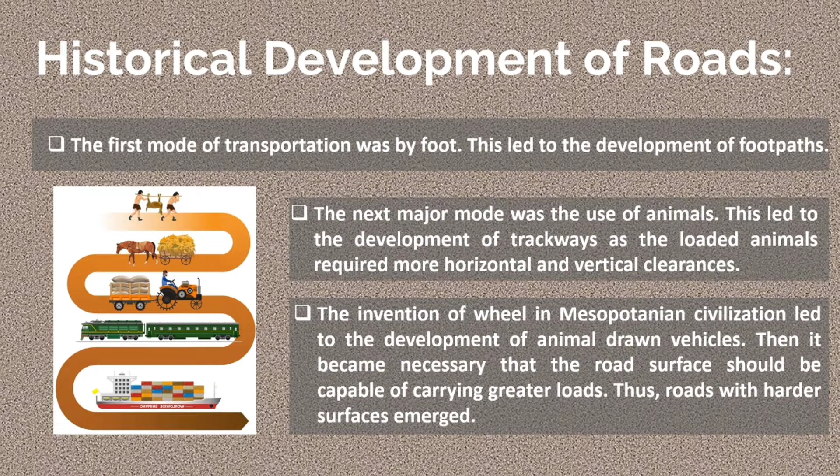Prior to our modern roadways, transportation went through a series of evolutions. The first mode of transportation was by foot, which led to the development of footpaths. Then the next major progress was the use of animals, leading to trackways, as loaded animals required more horizontal and vertical clearance. Then came the invention of the wheel in Mesopotamian civilizations, leading to animal-drawn vehicles. Later, it became necessary for road surfaces to carry greater loads, so roads with harder surfaces emerged.

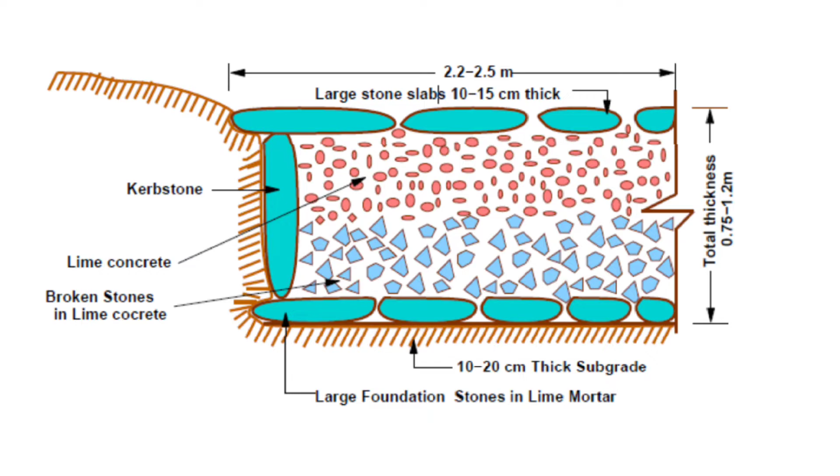The Romans were the first to construct an extensive system of roads radiating in many directions from Rome, since they recognized that the fundamentals of good road construction were good drainage, good materials, and good workmanship. The roads at that time were constructed on firm ground subgrade and strengthened with wooden piles when necessary.

Then came the Tresaguet road of France, the next major development in road construction, which occurred during the regime of Napoleon Bonaparte. He developed a cheaper method of construction than the lavish and locally unsuccessful revival of Roman practice. The pavement used at that time was 200mm pieces of quarried stone of a more compact form and shape, such that they had at least one flat side, placed on a compacted formation. Small pieces of broken stone were then compacted into spaces between the large foundation stones to provide a level surface.

Then came Telford in England. They proposed a similar type of road to that of Tresaguet in France. A sloping surface on top was achieved by providing varying sizes of stones in the foundation. For lateral confinement, Telford used a block made of broken stones set in lime mortar.

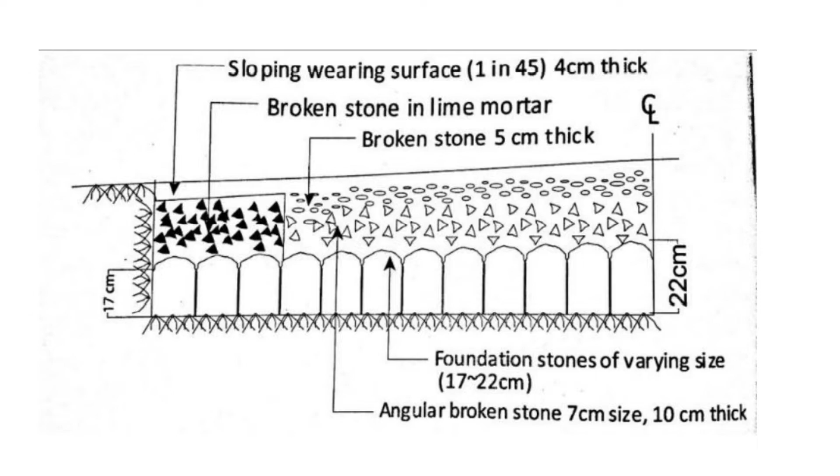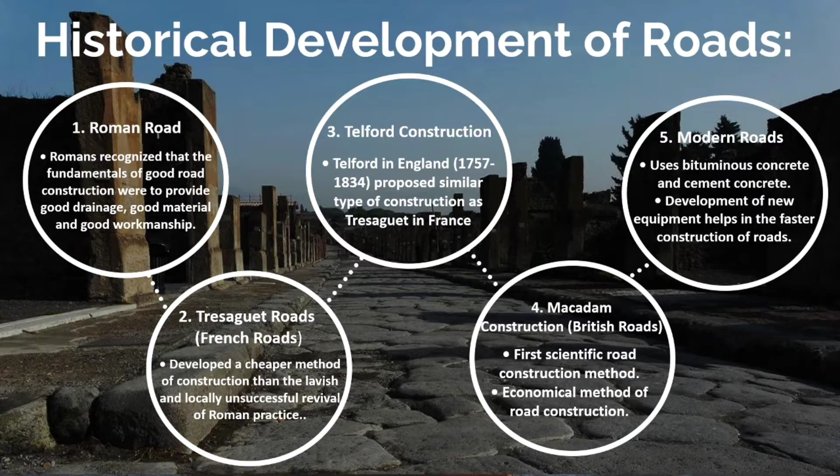Lastly, the macadam construction, the first scientific road construction method. John Macadam, a Scottish road builder, is considered the pioneer of modern road construction. He realized that 250mm layers of well-compacted broken angular stones would provide the same strength and stiffness, and a better running surface, than an expensive pavement founded on large stone blocks. This led to what we have now as modern roads, which follow the macadam construction method but use bituminous concrete and cement concrete, along with numerous innovative equipment and technologies to help enhance road building in a more effective and timely manner.

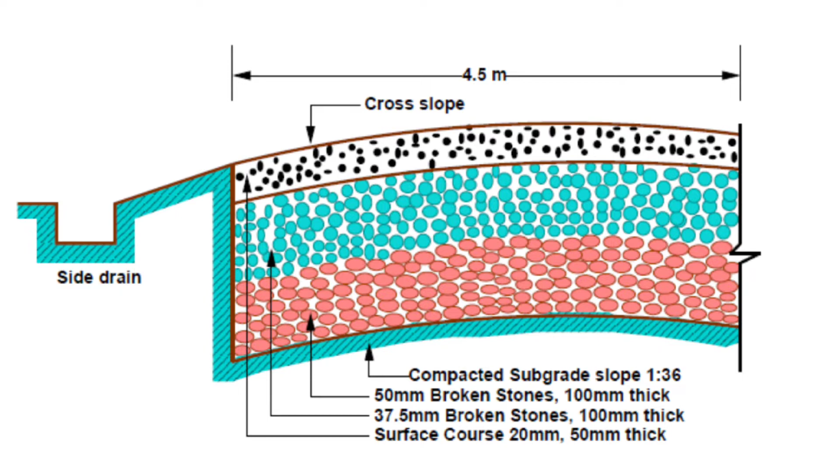As a result, transportation plays an important part in our society. In fact, the measure of development of any society is characterized by how developed its transportation system is. Advancement in transportation has made a vast change in the quality of life of people. The impact of transportation can be summarized in terms of economic role, social role, political role, and environmental role.

In terms of economic role, transportation serves as a medium in the production, distribution, and consumption of goods and services, which are inevitable without transportation facilities. In social role, the development of the transportation system influences the formation of urban society. In political role, the world is divided into different political units for mutual protection and economic advantages, and the development of common culture is linked by the transportation of both goods and people through different modes. However, in environmental role, the environment is highly affected by transportation, but more in a harmful way than a good way.

Now that we understand the history of roads and transportation as well as their importance in society, let's take a look at the process behind the building of our transportation infrastructures.

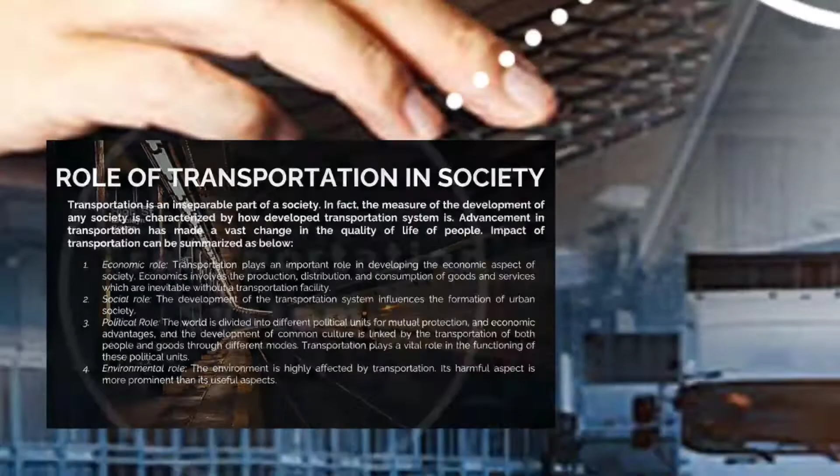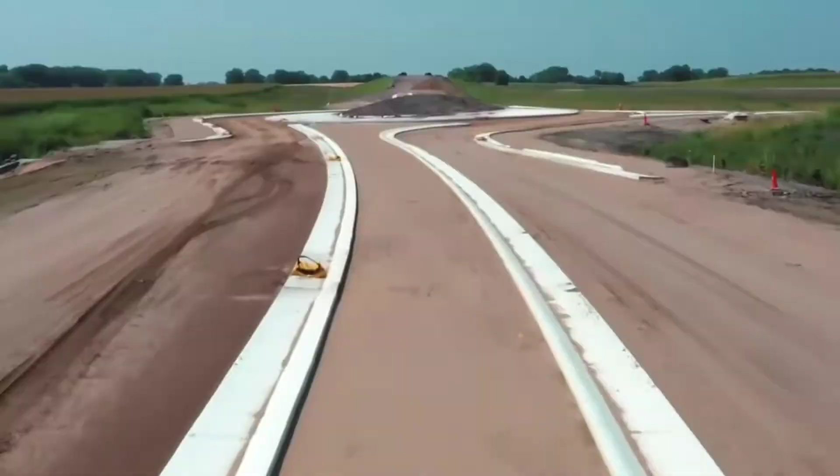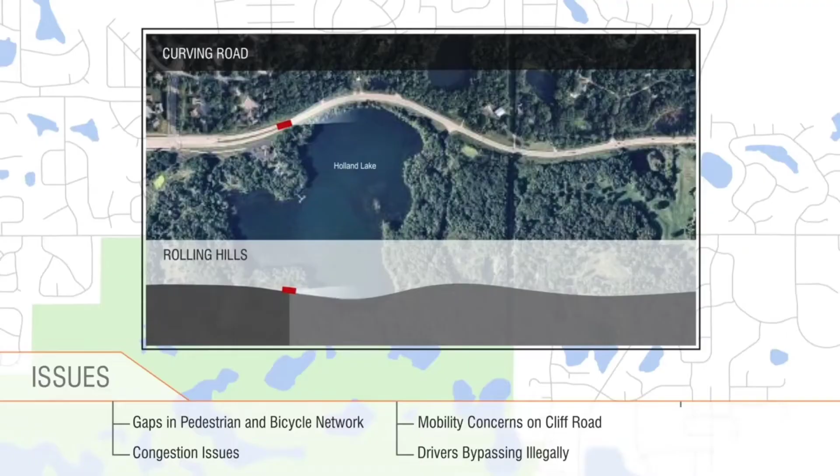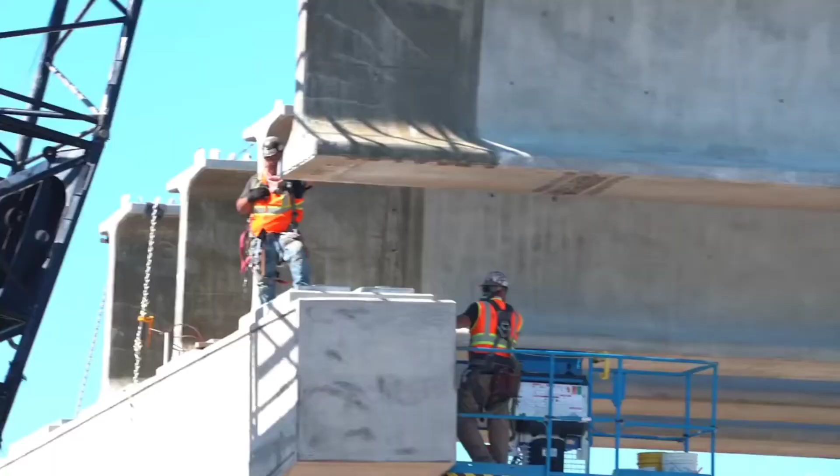What are the main factors we take into account when relocating to a community? Transportation. Among the numerous things that worry people, transportation is one of the most prevalent. Our responsibility is to offer infrastructure that provides comfort and fulfills the needs of the populace and spurs development. Looking at the current status of regional transportation, designing for future demands, and fusing all the elements of finances, goals, and policies constitutes the process of transportation planning. By assessing everything from streets and highways to cargo ships to public transportation and bike lanes, it helps influence how a town or city expands.

In order to shape cities, enable economic activities, foster community connection, and improve quality of life, transportation planning is absolutely crucial. Assuring safe accessibility for everyone at all levels is also essential for long-term sustainability. Transportation planning is the process of looking at the current state of transportation in a region, designing for future transportation needs, and combining that with the elements of budgets, goals, and policies.

It helps shape how a community or city grows by evaluating everything from streets and highways to cargo ships, public transit, and bike lanes. It can influence everything from business to the creation of quality of life.

There are two types of transportation planning: short term or medium term, and long term. Short term and medium term planning can be defined relatively in the same way. They are less complex and put less demand on construction activities and require less capital expenditure. This means it has the lowest cost because it only covers 1 to 2 years for short term and 3 to 5 years for medium term.

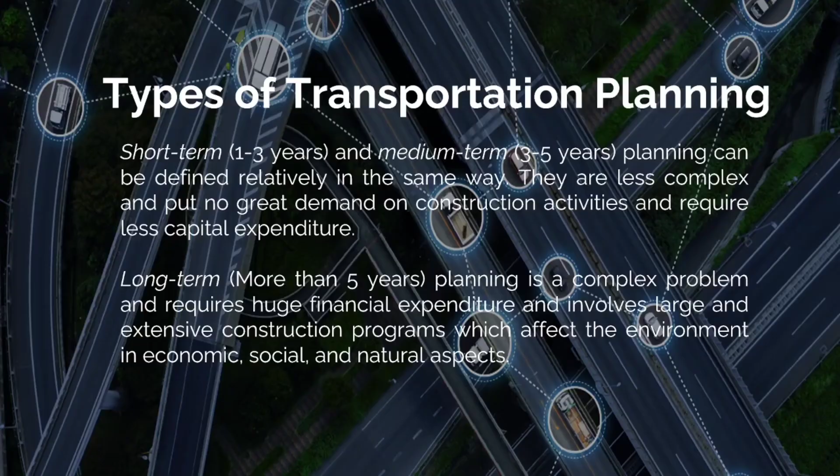Basic elements of transportation planning. The first one, we have transportation system database. Planning for transportation must begin with an understanding of the components of your transportation system as well as the state and functionality of these facilities. The majority of transit agencies provide a list of the many assets that make up a transit system, like buses, stations, shelters, rail cars, etc. The major responsibility for keeping the transportation system database current typically rests with the transportation engineers and planners concerned.

The second one, we have socio-economic and land use. This focus in transportation planning is on the supply of transportation infrastructure and services to meet current or anticipated travel demand. Derived demand is a key idea in transportation planning that has a big impact on how such demand is calculated. Therefore, trip making must be related to the different activity kinds that take place in a given area as well as the qualities of trip making that will affect how these excursions are made.

The third one, goals and objectives. Transportation systems relate to far bigger challenges than just giving people a way to get from one place to another. Goals are broad statements that describe the outcomes that a transportation plan is intended to attain. Objectives are more detailed statements that explain how these aims will be accomplished. Goal and objective setting is very essential because it establishes the evaluation standards that will be applied later in the planning phase and to compare the relative effects of various projects and methods.

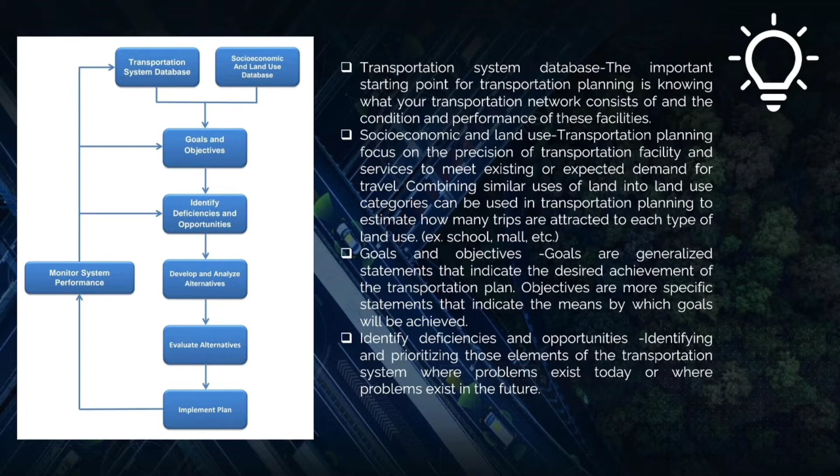The fourth, identify deficiencies and opportunities. The goal of transportation planning is to identify and prioritize those parts of the transportation system that are currently problematic or will become problematic as travel demand rises. Planning for transportation can also spot locations with serious issues where alterations in the system may offer chances for the improvement of operational efficiency. There are many different ways to find these deficiencies and possibilities.

Fifth basic element of transportation planning is develop and analyze alternatives. Once the planning process identifies areas where improvements are needed, transportation planners determine different strategies that could solve the problem. The purpose of this is to estimate how each of the proposed alternatives would perform under present and future conditions. Planners are looking at a wide variety of strategies, for example, strategies that involve improvements to highways, such as adding new lanes, improving traffic control through signals or signing, or improving traffic flow through channelization.

This element also involves the use of mathematical models for estimating travel demand. The number of persons or vehicles that will use the system is determined, and this result, expressed in vehicles or persons per hour, serves as the basis for project design.

The sixth basic element of transportation planning is evaluate alternatives. Evaluation brings together all the information gathered on individual alternatives. One of the most used approaches is the benefit-cost ratio, which compares the alternatives on the basis of discounted benefits and costs. The purpose of this evaluation phase is to determine how well each alternative will achieve the objectives of the project as defined by the criteria. The performance data produced in the analysis phase are used to compute the benefit and cost that will result if the project is selected. The benefit-cost ratio for each project is calculated to show the extent to which the project would be a sound investment.

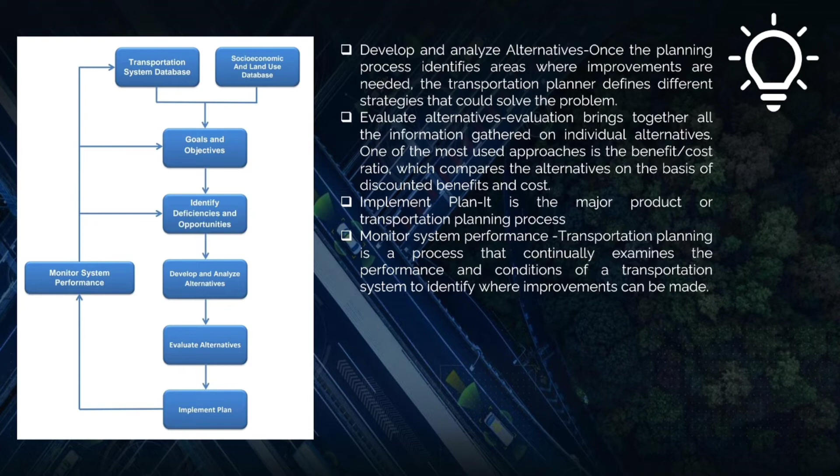Importance of transportation planning. Transportation systems require continuous planning to optimally satisfy the mobility requirements of society. Planning becomes significant when the resources available are limited and requirements are higher. The main objective of planning is to optimally utilize the available resources in the best possible way and in a very systematic manner.

So, transportation planning is highly essential in shaping cities, enabling economic activities, promoting community interaction, and enhancing quality of life. One importance of transportation planning is the growth in the demand for mobility, where it gives considerable growth of transport demand, larger quantities of passengers and freight being moved, and longer distances over which they are carried.

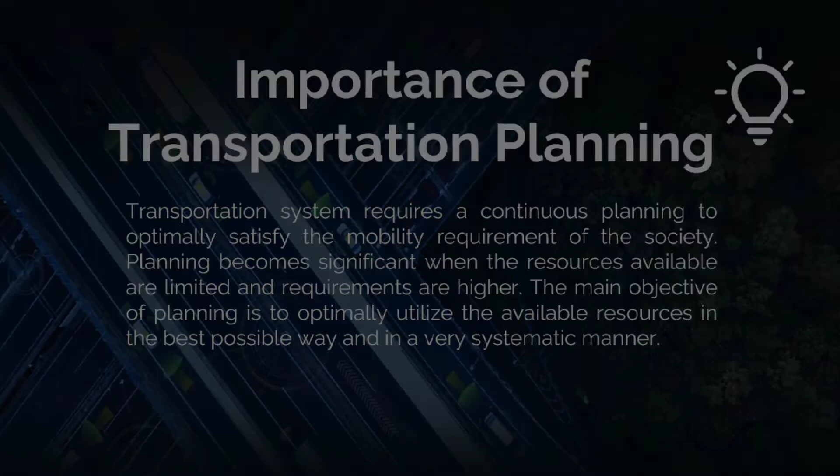Transportation planning is necessary to ensure that hazards and conditions are routinely fixed and are made up to standards in order to guarantee the safety of those on the roads. Most people spend about an hour traveling to and from work, not to mention all the other traveling we do.

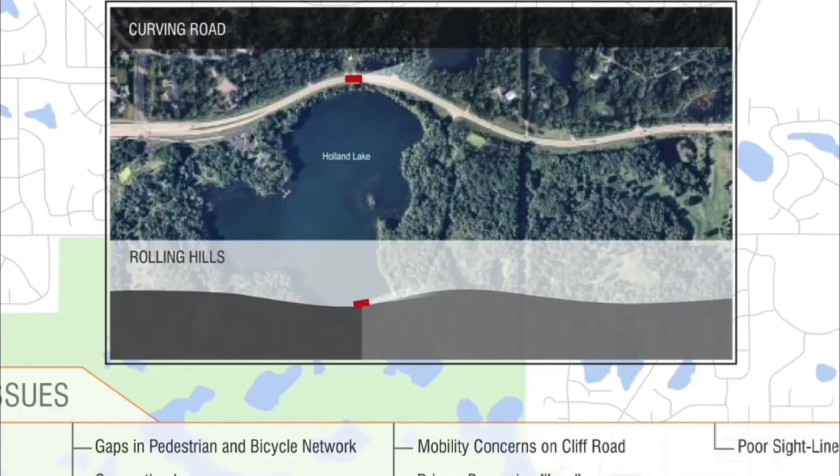But despite all the work engineers put into making those journeys go smoothly, it seems like things go wrong. Maybe you've been delayed at the airport, encountered signaling issues on the subway, or got caught in a traffic jam. While the weather often plays a role, one of the biggest reasons that transportation systems run into issues is that they have to deal with another persistent, difficult, and unavoidable element: us. If you want to design a good transportation system, you have to understand the people who are going to use it.

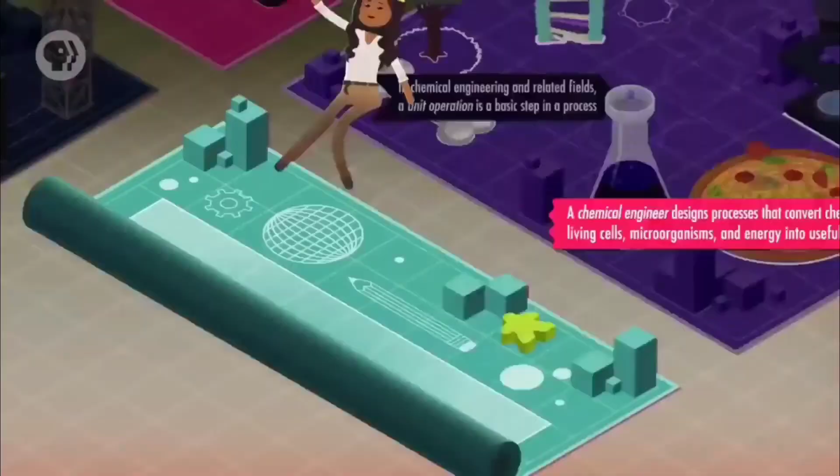Transportation engineering is a branch of civil engineering that is involved in the planning, design, operation, and maintenance of safe and efficient transportation systems. These systems include roadways, railways, waterways, and intermodal operations.

Typically, the demand is the amount of traffic, which are people, cars, rail cars, and barges, that is expected to use a particular transportation facility, while the supply is the quantity and type of infrastructure components such as roadways, bridges, pavements, etc. So that means every highway, railroad, shipping lane, and airline route relies on transportation engineers to guide the way.

Suppose you were tasked with setting up a subway system for a city. You'll need to plan, design, and construct every last element before it can function. What's more, transportation systems are almost by definition heavily connected. Every piece needs to support all the others. And once a system is up and running, you need to constantly monitor how it copes with demand. That will help you make decisions like how to improve access to stations and how often to run trains.

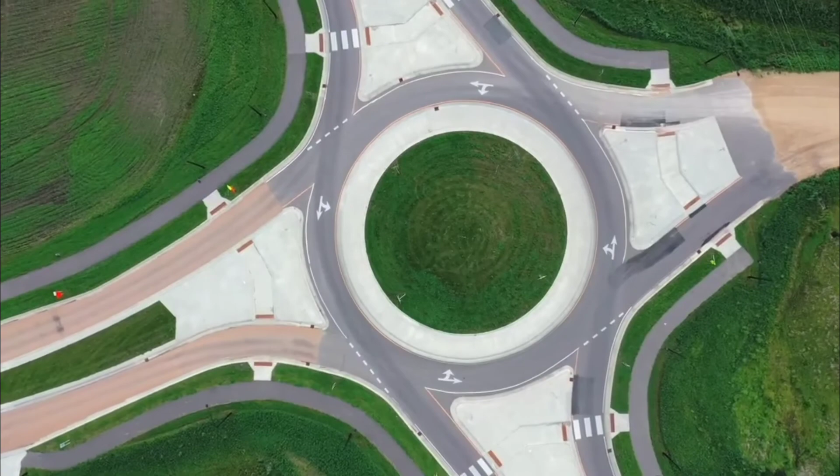Unlike other disciplines we've looked at, this kind of engineering isn't about processing inanimate materials into something that we use or consume. It is about moving people in a way that is safe, convenient, and comfortable. That means considering social requirements in addition to physical ones. But, like everything else in engineering, cost is one of the biggest constraints you have to work with. Since you probably have a fixed budget for setting up the system, you need to prioritize what to build and where.

And to do that, you have to understand what kinds of journeys are going to be made. So, with the subway, some people will want to visit their friends or go shopping, while others are just trying to get to work. The layout needs to support those different needs, while making enough from the passenger fares to keep the system up and running. So the social and economic goals of your city have a big role in the design of the network. In general, transportation engineering is often about taking a bunch of different priorities and combining them in the best but rarely perfect way.

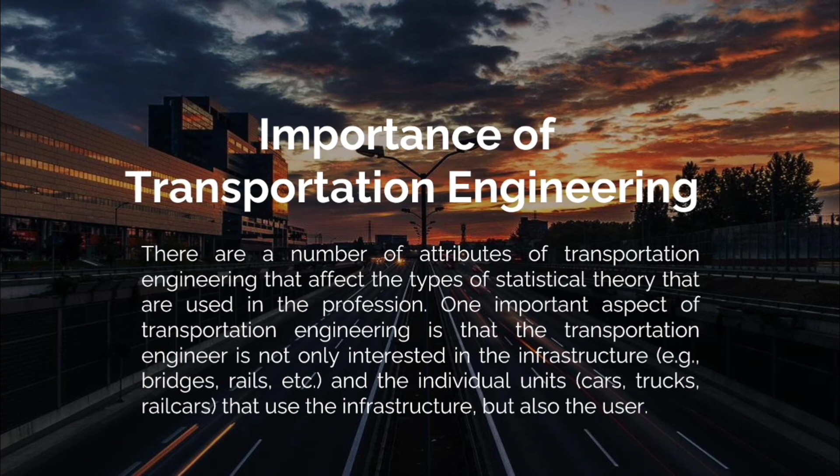Importance of transportation engineering. There are a number of attributes of transportation engineering that affect the types of statistical theory that are used in the profession. One important aspect of transportation engineering is that the transportation engineer is not only interested in the infrastructure and the individual units, such as cars, trucks, rail cars, that use the infrastructure, but also the user.

So, transportation engineering and planning are concerned with the movement of people and goods by means of highways, rail, air, water, and information technology. Presently, urban and intermodal means of transportation are high development priorities. Transportation has played a crucial role historically in connecting countries and continents, promoting economic and social integration of the various regions of the world.

All forms of transportation influence our lives and raise environmental, health, and safety issues. Transportation is intimately interwoven with the daily lives of individuals and organizations in our society. It is easy to overlook its significance until it fails in some way.